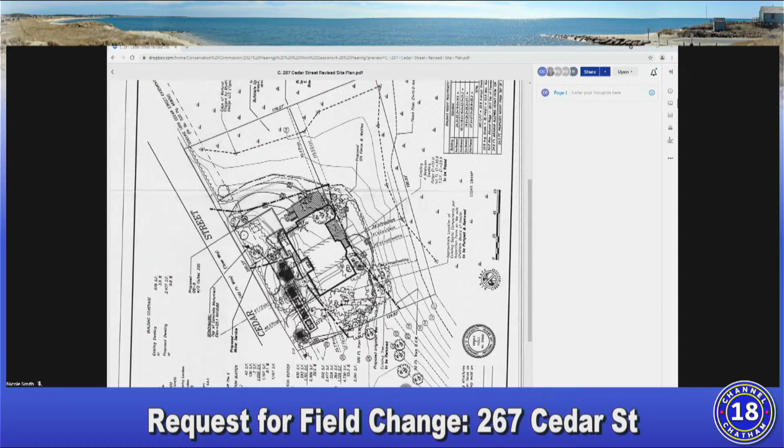Where are you? You're still muted. All right, we just come back to her. Commissioner Sullivan? Yes. Okay. She's not responding. Maybe she had to step away.

So we have one, and I vote aye. 1, 2, 3, 4, 5, 0, and 1 not responding. So it's either way, it's approved. Thank you, okay, all right, thanks very much.

Okay, Nikki, moving on. Sorry, my session got dropped. This is Karen Latin. Gosh, so I'm back on now. For some reason it just suddenly died. It happens, yep, sorry, I always blame Comcast. But I say aye. Aye. Okay, all right, Nicole.

All right, next we have 34 Hallway Street, 34 Chatham Village Trust, map 17C, parcel 16A. Again, this is a request for field change for installation of an irrigation well. For the record, Sean Riley, Coastal Engineering, representing the applicant. The well is to be located between the house and the street. Access is from the street. And again, it's for the significant amount of mitigation plantings that we need to maintain for the first 3 years, so essentially the same request.

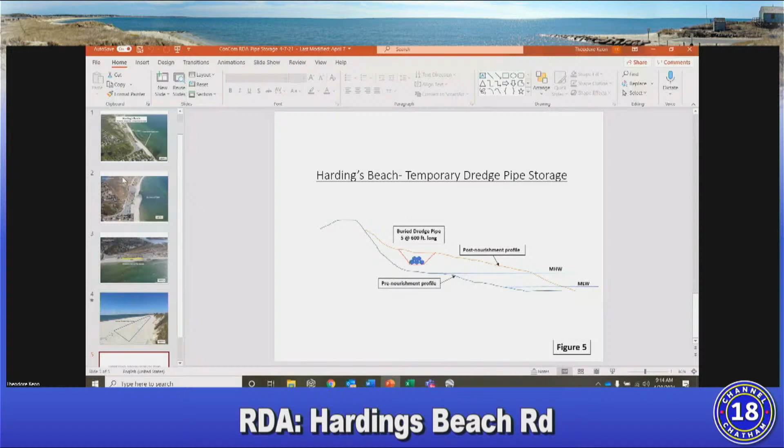Not, well, can you go to the first one? This one? Figure 1, yeah, that's the first. Can you rotate it? Everyone put their laptops on the side. Oh, my laptop, sorry. That's okay, that's okay, we can see. Yep. Ted, right, if you want to share, feel free. I'll exit out. Well, I mean, I think this will work. Oh, well, okay. I can't see what I'm sharing, so it's hard for me to. Understood. Okay, does that work? Yep, okay.

So we did have a site visit last week. I believe 4 commission members were able to attend. So for those that weren't there, I'll just kind of rehash what the discussion was.

A little bit of background. The town has been very active, as I'm sure everyone is aware, with dredging at Stage Harbor, given the very substantial changes that are occurring over there and the infilling of the channel, which has required repeated dredging over the last couple of years, and we fully anticipate into the near future, unfortunately. We dredged last year with a private contractor, and they pumped the material to Hardings Beach, and they focused on both of the parking lot areas where the primary recreational activity occurs. As you see in this picture, there's a very substantial indent, if you will, between the 2 beaches because we just didn't have enough material to progress through that area.

Looking ahead to this current year, the town knew that we were going to be dredging again. The county was able to put us in the schedule; they weren't able to last year. But one of our target sites was the Cockle Cove area, which was very severely depleted in material as well. In order to get the material to Cockle Cove, which is a very long distance, we had to supplement the county's inventory of dredge pipe with an additional 3,000 linear feet, with the full intention that the town would maintain that pipe in the town and provide it to the county for future mobilization as needed and as necessary.

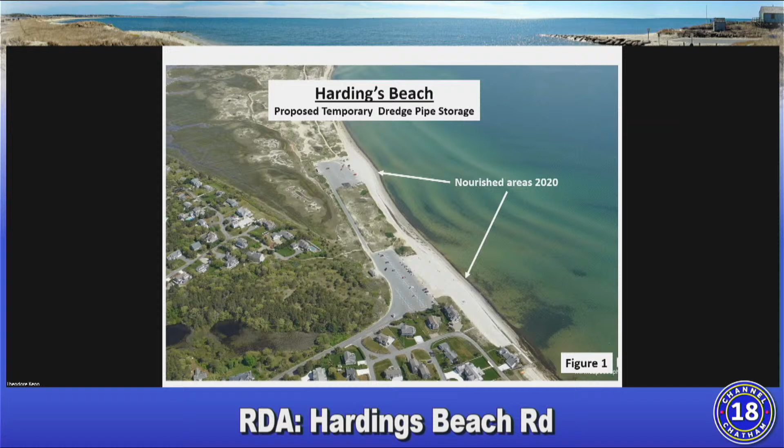So the second picture, we had pretty much gotten much of Cockle Cove filled, but the production was relatively slow because of the very long distance. And we were running out of the window of when we were allowed to do the dredging.

Since Cockle Cove was in pretty good shape, we decided to put the remainder of the material in the area we didn't do last year, between the two parking lots. We placed about 14,000 yards in this area and really improved the midsection, much to the delight of the Park and Rec department, who want to use this area as part of the overall recreational beach area.

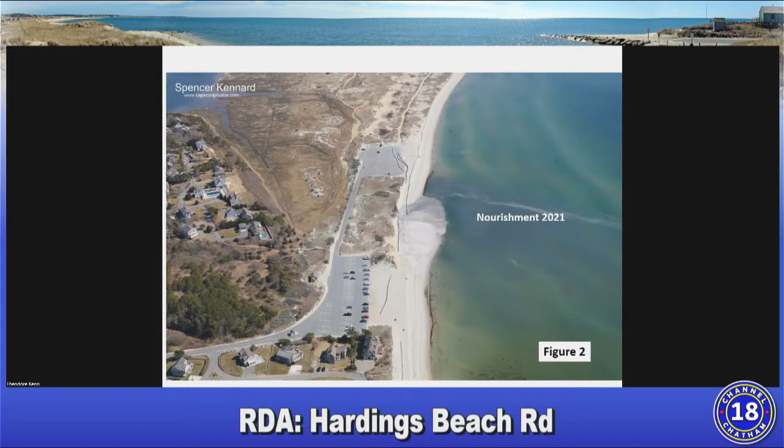So now that we have restored this beach, we have an opportunity to put the pipe under the sand and temporarily store it in a manner that's out of sight, out of mind, and out of resource issues. It doesn't impact the performance of the beach whatsoever. The beach is sufficiently wide now, so the beach functions will be maintained, and there's no vegetation affected.

Based on this picture, there was one initial preferred option at the time before we had done the beach project. We were planning to perhaps put it up in the parking lot in this corner, but that became very problematic to secure the pipe, both for safety reasons, kids climbing on it, and so forth.

The Park and Rec Commission, who had reluctantly agreed to put it there if that was the only option, really wanted it screened with fencing for aesthetics as well as safety reasons. That became another problematic issue.

I had a fencing contractor come look at the site, and he basically didn't want to do the project because he didn't know how he'd secure an appropriate temporary fence, given the wind loads we get here, plus the safety issues.

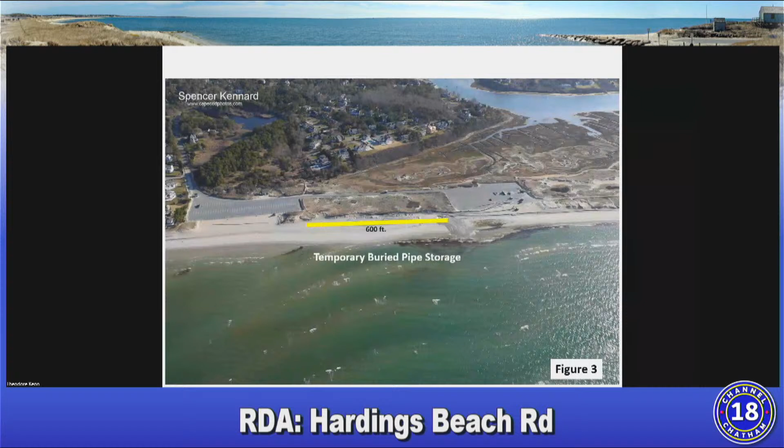Once the beach was completed, it became quite obvious that this would be a very viable place to put the pipe under the sand. Again, it would be well out of the vegetation zone and well up on the beach, so the beach would still function as normal with no impacts whatsoever.

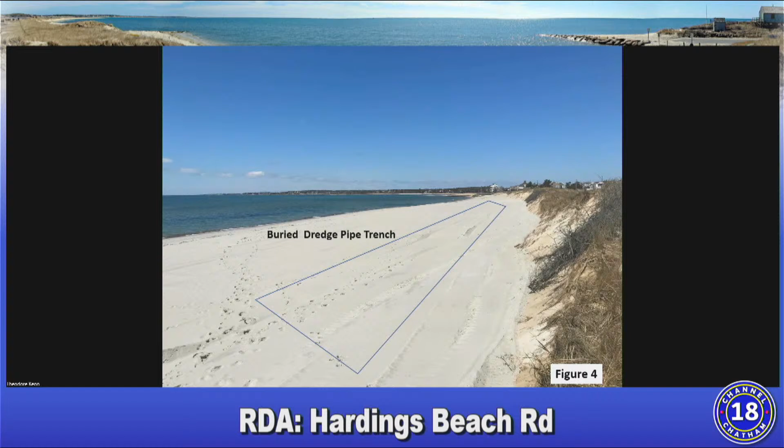As I indicated in the RDA, this has been done for several years in other locations on the Cape. Dennis, for repeated dredging at Sesuit Harbor, does it in this manner, and Pamet has been doing it for many years associated with dredging up there.

This picture gives a representation. The blue line is approximately what the beach looked like prior to the project, and the red line is the beach after nourishment. You can see a very substantial increase on the active portion of the beach, and the displacement seaward of both the high and low water line.

The idea is to have an excavator create a trench along the upper portion — a very straightforward process. We would take the 3,000 feet and lay it in 600-foot sections. The pipes are now fused together in 300-foot lengths, so we have 10 sections, which we turn into 5 sections of 600 feet, since we have plenty of beach length to do it.

So that is the proposal. The entirety of Harding's Beach is under an existing order of conditions to allow nourishment, with activity when these projects are done with equipment on the beach in order to create the beach. But once the project's done and cleaned up, the beach looks like a beach.

So that is our request — if we could place the pump, or pipe as I keep calling it since we pumped it here, into the trench. Right now the pipe is being handled for relocation over to Chatham Harbor. Once that project is completed, our section will come back and be available for storage, hopefully in the mid or latter part of May. Given the time of season, the recreational concerns are legitimate, and we really want to get rid of the pipe as soon as possible.

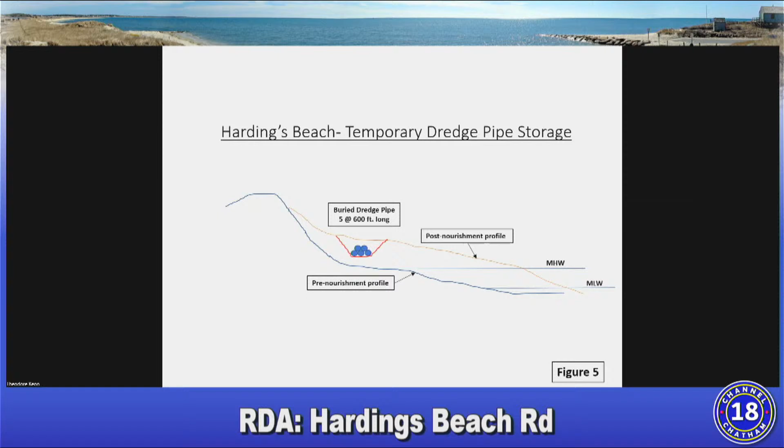The only other really viable option we would have is to cut the pipe back up into its initial 50-foot sections, which is how it's delivered to the site, load it up on trucks, take it to the water treatment plant, store it, and then next year, when we'd be doing another project of this nature, put it all back together. That's not an easy or inexpensive operation. We're estimating that would annually add approximately $20,000 to $25,000 per episode to get the equipment, expertise, fusion machines, and trucking back and forth. So if we can avoid that, that would obviously be our preference.

And with that, I'm back. Okay, happy to answer questions. Thank you. Oh, feedback.

I just have a quick question about the dimensions. The trench is 600 feet long. What is the bottom depth? How far down do you dig? And how far above the placement of the top of the pipes would the surface be? That's going to be somewhat of a field call. The diagram I showed had the pipes, 3 on the bottom, 2 on top. It may ultimately be preferred to just lay them 5 side by side. We've still got plenty of room. I'd be working with the excavator operator as well as our dredge supervisor from the county, who has done this, and kind of play it by ear on what we feel is the best method to get it in there. At a minimum, we'd have at least probably 3 feet of cover over the pipe.

3 feet. And how far seaward from the bottom of the vegetated dune would the trench be located? Probably about 10 feet or so. Well, again, well beyond the toe. Okay, a minimum of 10 feet. You've got to figure out, yeah, you've got some, okay.

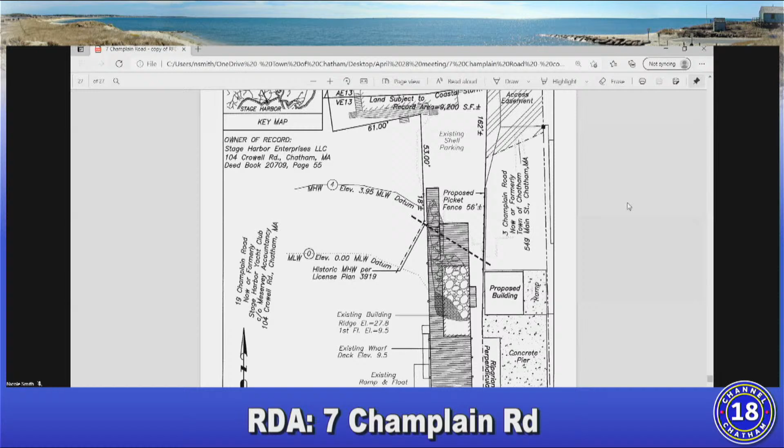Good morning, David Clark here on behalf of Stage Harbor Enterprises. I would think this is a very straightforward project. In the narrative, I did outline the need for this fence. Being a sailing school with dozens of kids there during the summer months, the club wants to have a barrier to keep the two uses separate. We have an industrial use next door and an educational use on our side.

The fence would go in sometime during June in the spring, and classes usually end the end of August, so the fence would come out after August. And being removable, if there was a coastal storm in the forecast, the fence could easily be removed, as well as all the other sailing items that would be on the beach. So there would be mobilization in the event of a storm to remove other stuff, and the fence is something easily removable.

No further alteration of the resource area is proposed, so we feel that this is approvable under an RDA.

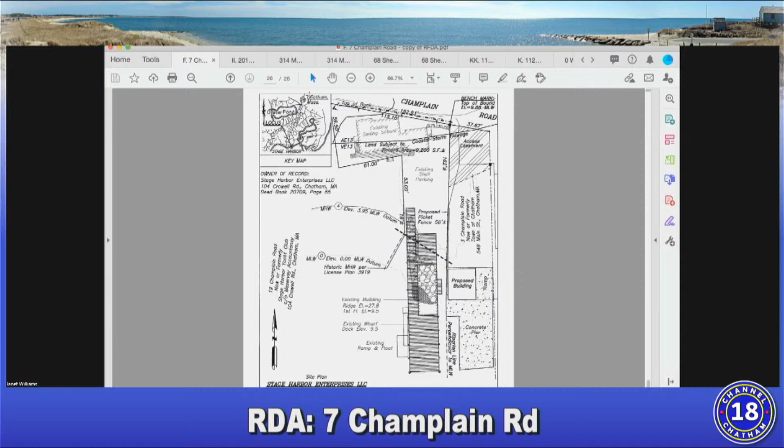All right, thank you. So David, as I read the photograph that is submitted, are these representative of the permanent supports that are proposed, or just the location of the fence? The location of the fence. So it's basically along the town's retaining wall. Okay, so it's going to go right up against that wall. Yes.

What will it be sitting on - some sort of support, or dug into the ground? I anticipate that it will be some type of galvanized pipe installed right adjacent to the wall that would be somewhat flush to grade, certainly not higher than the wall, and the fence post could either slide into it or over it, one of the two. Okay, that makes sense. So nothing - I was looking at this going, are they going to be sticking up like that?

Okay. And the fence, is it plastic material? I believe so, plastic, okay, so a white plastic picket fence. Gotcha. Okay, questions?

Rawls, I was wondering how tall the fence is. I believe it's 4 feet. And the slats, is there a distance between them? Yeah, probably a couple of 3 inches or something like that. There's a vertical barrier now for wildlife because of the retaining wall, and it's not really habitat for large wildlife anyway because of the commercial use next door.

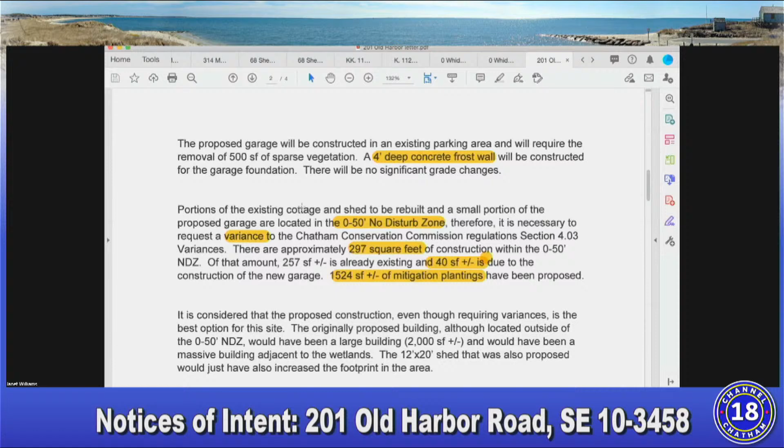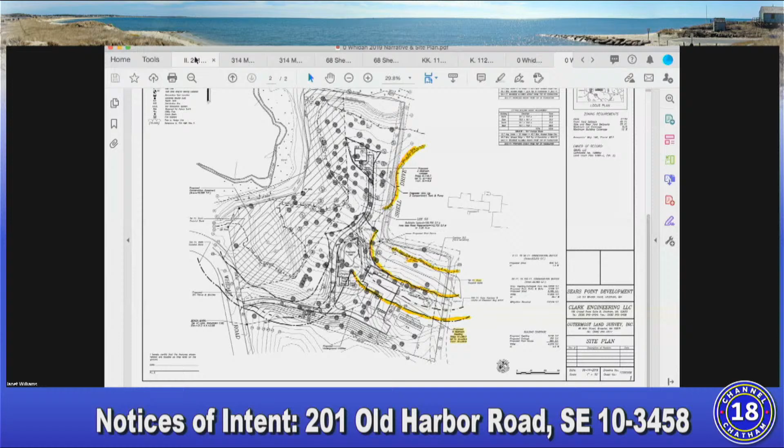It should be added to your narrative. Okay, I will ask our surveyor to look into that. Yeah, it's pretty clearly spelled out. Is that on the town website? If I may note, look at sub 2 and sub 3 of that section.

Oh, you know what, that's the one that's missing from the website, Janet. That's why we missed it. I just opened up my packet and took a look, and that's the page that is missing. So we need to get you a copy of the provision. Yeah, they still haven't corrected it. Maybe we ought to ask the town to add that. Again, we've asked, we'll ask again.

In the meantime, we will get you a copy of that. Make sure you have it to give to your surveyor so they can match the requirements. Excellent, thank you. Okay, so with all of that, the next hearing date is May the 12th, which would mean you would need to get us everything we just talked about by May the 7th at the latest. Is that doable? Let me look at the calendar.

It's 10 days from now, essentially. We need to get you more information 10 days from now. Or we could push it out to May 26th and give you 2.5 weeks to do it. No, I don't want to push it out anymore. We started this in August of last year, so it's a long process, but we're getting there.

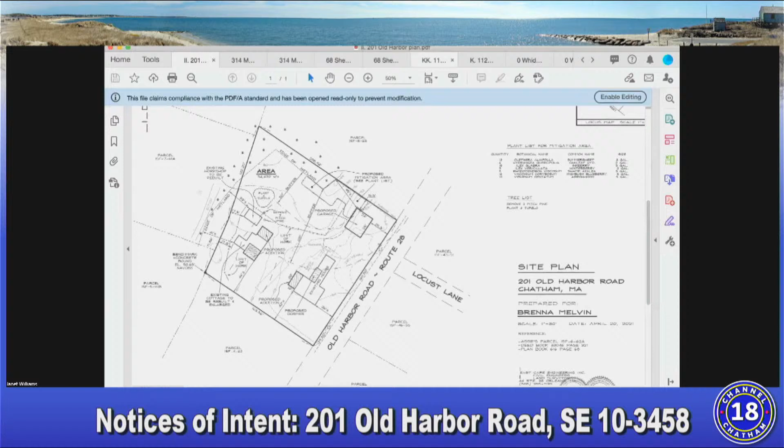That's continued to May 12th. We'll see you back here then, Mr. and Mrs. Melvin, thank you for coming. Hopefully we'll wrap it up at that point and you can get going with your project. Thank you for your time. Thank you very much.

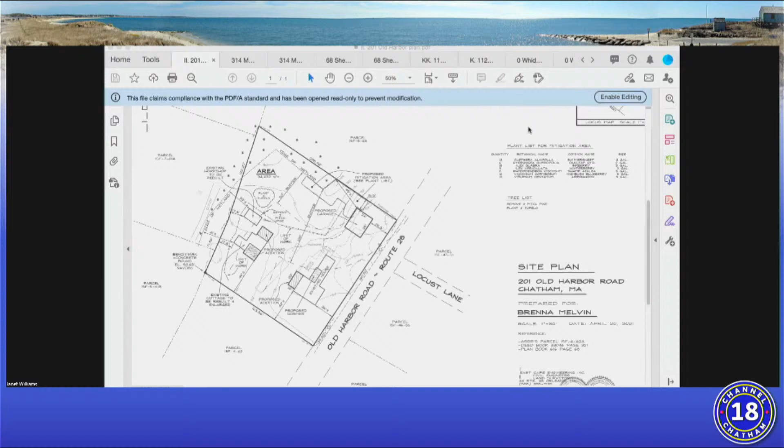All right, Nicole, next one. 314 Morris Island Road, Timothy Sheehan, trustee, 692 Tremont, Unit 4 Realty Trust, map 15A, parcel H87, SE 10-3468. Continuance of an after-the-fact notice of intent for the proposed installation of a garden shed and garden.

I did receive in my email a request to withdraw this morning, which I was expecting at least. So I don't know if Thad wants to speak. I would encourage him to, because I think some of us have something to say about this. Sure, Thad Eldridge here, East Southeast. We have submitted the request to withdraw this application. I've reviewed a timeline with the agent to get a new permit in place for the remediation of the area, and we'll happily take your comments.

Wait a minute, when you say a new permit in place, is there going to be another NOI filing for the restoration? We have to do something, the old permit is now expired. Right, and if he's going to go in there and restore the garden into what it was originally permitted to be, which was native landscaping, he's going to need some mechanism, some permit in place for that.

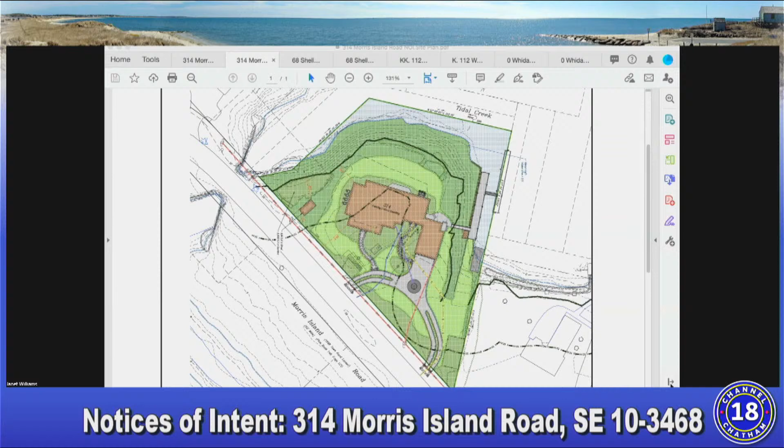Okay, then is there a motion to approve the withdrawal of the NOI for 314 Morris Island Road? Rawls move to approve the requested withdrawal. Is there a second? No,

Let's be a little bit more specific on the motion. I mean, we can approve the withdrawal, but we also need to approve the agent sending out a letter setting appropriate deadlines for new filing. Okay, do you want to phrase that as a motion? That would be good.

Okay, let's see. The motion is that the commission would approve the withdrawal contingent on the agent sending a letter to the homeowner noting that they are still under a violation notice and need to file a new notice of intent in order to correct things by, let's see, what date, did August 10th, right? Mm-hmm, yes. Yeah, that the letter would note that August 10th is the new date for the submittal of an NOI to correct the violations that have existed on the property for some time.

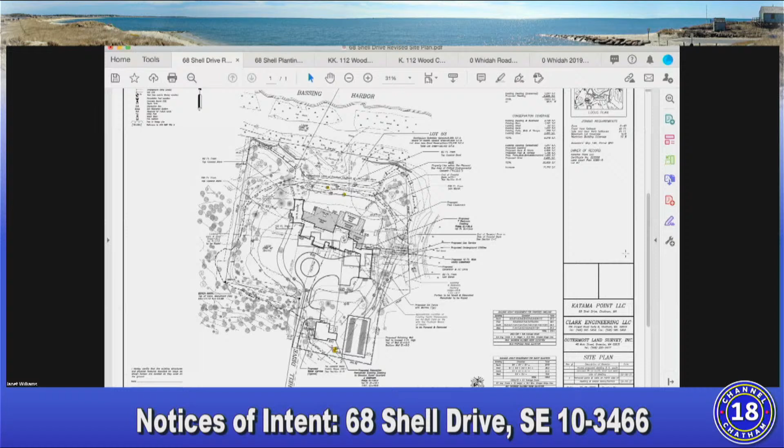So basically what we've done is we've left the driveway so that it is at the floodplain or a little above it, and that's so we have fill between the driveway and the house. I was talking with Jay Briggs, and he said, 'Do you need all that fill?' I said, 'Well, no, we could always put a retaining wall there, and then somebody could fall off and hurt themselves.' But, so we've even removed fill, or proposed to remove some of the proposed fill,

in greater amounts than is shown on the plan you have. Basically, the fill we want to bring in is for the driveway, so that emergency vehicles can have access. There are other homes on Shell Drive, but no place to turn around, so this would give emergency vehicles a place to turn around. It would also provide access to the property, even in flood events, which we hope don't happen.

And we're proposing to extend the berm on the Bassing Harbor, the water side of the property. The berm was built there back in the 90s. And as you might recall from the Woods Hole presentation, one area where flood waters can enter the property is at the western end of that berm. So what we'd like to do is finish that berm and merge it into the higher ground there on the west side.

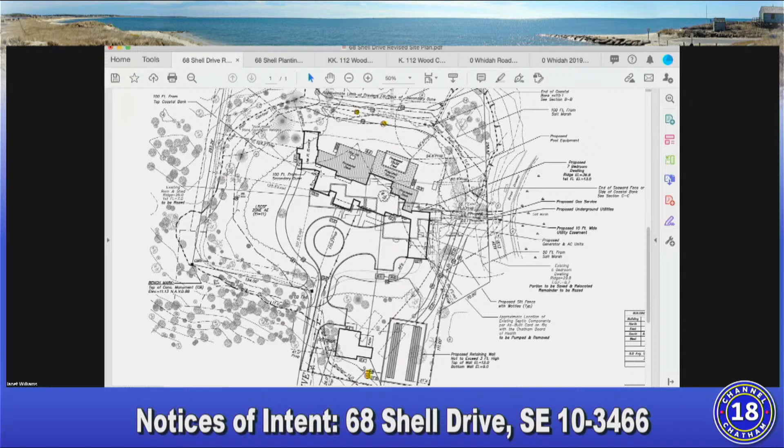Okay. I'll check with Sarah Clark and send you an email, but there's certainly time for a couple of meetings with the commission before our zoning day. Okay.

Okay, with all of that, are there questions? We have lots of questions, but I think most of them will get resolved once we have a revised plan, a narrative, and conduct an on-site visit and understand exactly what the proposal is at this point. Let me just ask if there's anything anybody else is asking for.

Bob Rawls: We're still bringing fill into the project, and whenever we're looking at a site map that shows contour lines, it doesn't tell me in a very clear way how much fill is being brought in relative to what's there now. So I was wondering whether you could, in a graphic way, indicate with hatch marks or color where areas of fill are going to be, and an indication of how much fill.

That way we could actually see it. I think the clearest way to do that is probably to do some section lines through the building, maybe 2 through the driveway and 1 on the north side. Right, something like that. Yeah, that would be great.

So you mentioned that there's a couple thousand square feet of additional coverage, the proposed deck on the north side. So is the mitigation plan changing? It will be, yes, but we don't have that yet.

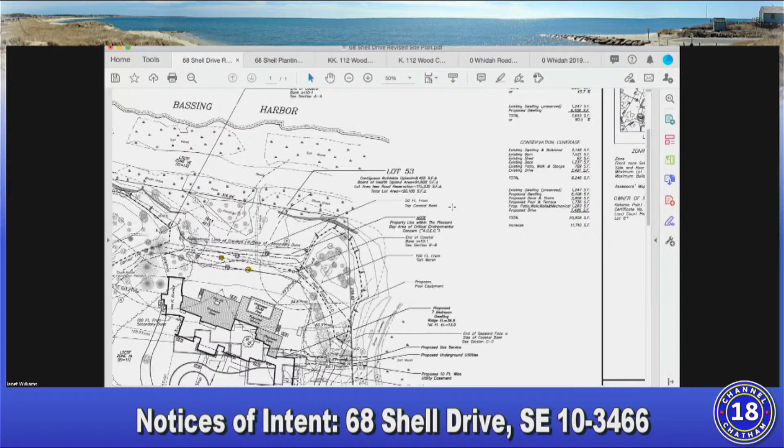Good morning, everyone. Teresa Sprague with Blue Flax Design. I'm just going to give you a quick overview and walk you through the land management plan that we've submitted, but having the site plan up while I'm doing this, I think will be helpful.

First of all, just a discussion of existing conditions. Much of the property is wooded, greater than an acre with existing mature canopy: oak, pitch pine, spruce, eastern red cedar, etc. We have a lot of existing naturalized vegetation, although the site does contain a significant amount of invasive vegetation, along with areas of undisturbed habitat mainly on the western portion of the property. The invasive vegetation includes bittersweet, border privet, shrub honeysuckle, autumn olive, porcelainberry, Japanese knotweed, barberry, multiflora rose, English ivy, vine honeysuckle, and burning bush, as well as a significant amount of native but aggressive greenbrier.

As noted, there's an easement wrapping around the south and west sides of the property that allows neighbors beach access, and the path within the easement begins on the west side of the shell driveway at the entrance to the property, and winds through the wooded area on the western side to allow access to the beach. So our proposal is to manage invasive vegetation throughout.

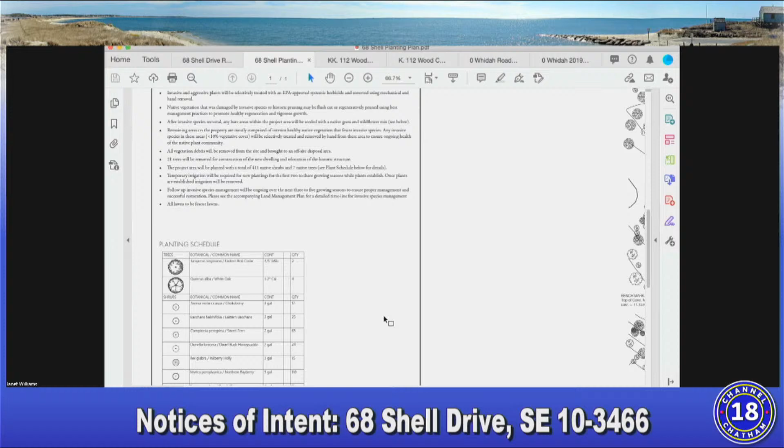So I guess in answer to Bob's question about whether we're increasing, I think if we're at 34,000 square feet of mitigation and restoration planting, I think we're pretty good in terms of area per coverage area. So I don't know that we have to increase it.

Well, Bob Rawls, I actually wasn't suggesting that it needed to be increased. I was just a little confused because the number of trees coming out, and the number of trees going in, and the number of shrubs going in are the same as from the last presentation. So I was wanting to make sure, but it does seem unchanged.

Right, and I remember at the last time we talked about it, we asked whether or not more trees could be put in to replace the 21 trees coming out. So I expected in this revision to see some discussion of that, but I didn't see it. Okay, I can discuss that with the applicant too.

Okay. Bob, anything else for now? I think for now we're fine. Okay, Bob Delvecchio? I had a question about

the planting of anything underneath the decks, the raised decks. Is it possible to plant any vegetation, shade-resistant plants underneath the decks at all? Well, the decks are located on the north side of the house, and I think it will be difficult to get any significant vegetation underneath the decks. To be very honest, I would imagine that underneath the decks would probably be gravel or pea stone to allow for infiltration of water coming through the decks. But I think the decks are going to be quite shaded on the north side of the house as is, so it would be really challenging to get significant vegetation planted underneath the decks.

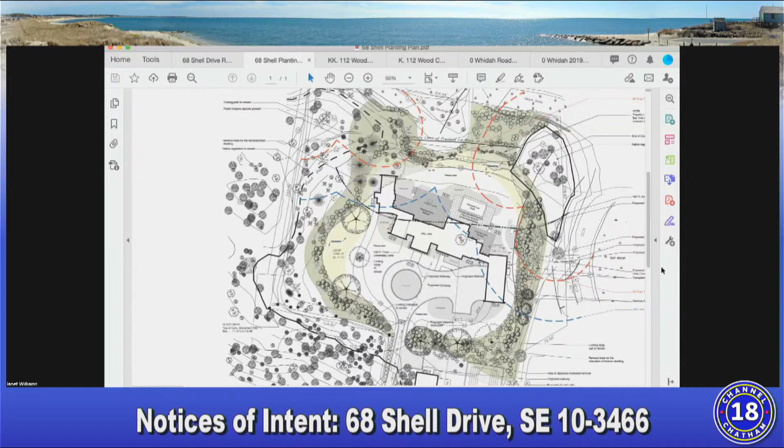Okay, I would say May 26th would be the first feasible date, given that we have to organize an on-site. All right, then I will try and set something up the week of the 17th for a site visit. Or earlier, depending on whatever everybody's schedule is, we should structure the poll to start as early as possible and see how we can get it in, even starting late next week.

Madam Chair. Yes. Is it possible we can continue it to the 12th in the event that we're able to get the meeting scheduled? The project's been hanging fire for a long, long time, and the applicant, understandably, is getting a little anxious for learning how we're going to be able to proceed. So I understand if...

If the site visit doesn't take place before the 12th, all we would do is send a letter in requesting a further continuance. Okay, but given the list of things that need to be developed and submitted before the next hearing, let me just run through my list, and Nicole, you can double check it and see if I've got everything.

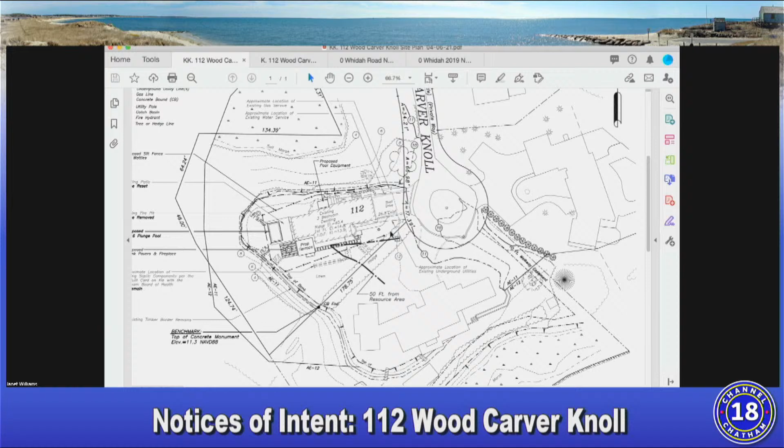The bank is well defined. It's relatively steep, but between the bank and the river are significant salt marshes to the west of this. We show a limit of work fairly close to the activity to minimize any transgressions. The total square footage of increase within the no-disturb zone is just under 550 square feet, and again, that's all within lawn area. This property was developed, I think, back in the 70s or early 80s, so there's been a maintained lawn around this house since it was built. And really, there's no loss of native wildlife habitat, just lawn, and mitigation is proposed for these increases.

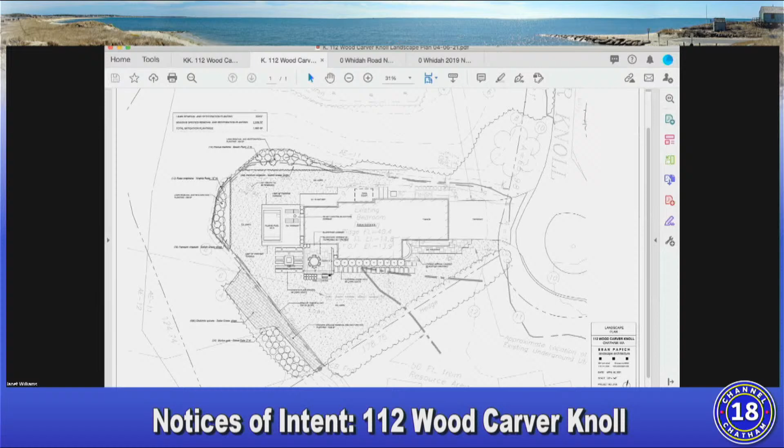And that would be my presentation. Okay, thank you. Is there also a landscape plan? Yes, I'm sorry, I think Sean Papich is also on the line to answer questions on the landscape. Are you all seeing the landscape plan, or is that showing up? Are you still looking at the site plan? I can't quite tell, I think we're seeing the landscape plan right now. Okay, thank you. Yes, okay.

Sean, are you there? I am here. Okay, do you want to walk us through the landscape proposal? Absolutely. So one of the things I wanted to mention - when David was speaking about the plunge pool, it's really more of a large spa. They come precast, it would be set at grade and proposed to be on the footprint of the existing stone terrace. There's already an existing terrace there, so our intention was to place the plunge pool within the surround of the existing terrace, just to make sure you're clear on that.

The other elements you can see are the terrace, which we also typically build as a permeable base. So we'd propose to do that in this case. Then the stepping stones heading toward the fire pit area between the two terraces will also be spaced with lawn joints, typically about 6 to 8 inches, giving a substantial amount of space for permeability.

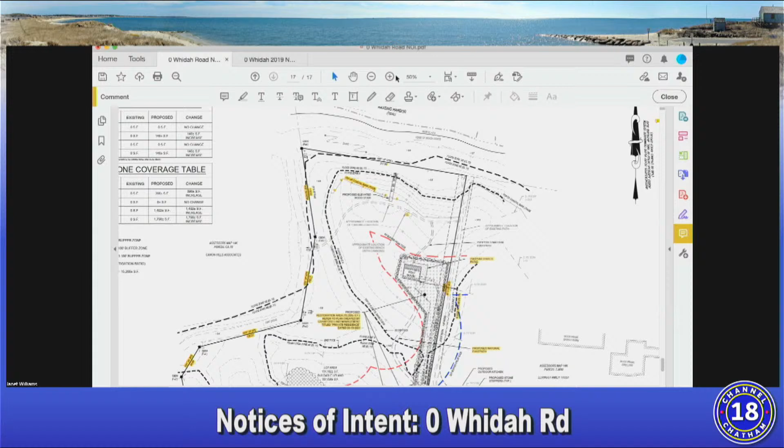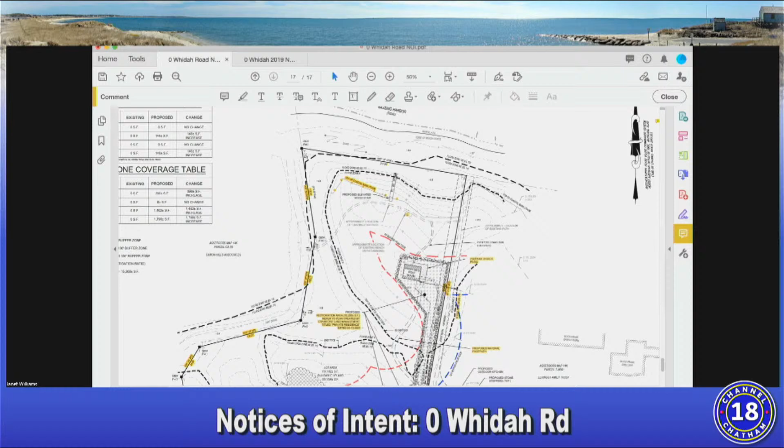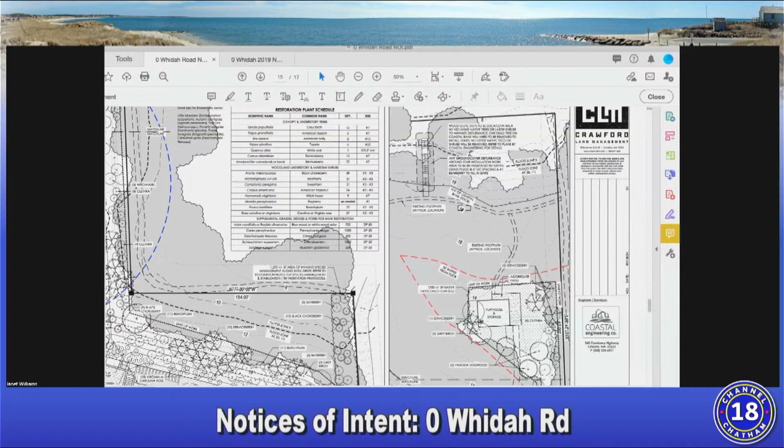I had a question about the staircase. The property is in the Pleasant Bay ACEC, and local jurisdictions in Pleasant Bay are required by state law to have standards stricter than what we'd otherwise apply. I noticed on the staircase design there was reference to a FEMA guidance document, and I thought, since this is in an ACEC, the more appropriate guidance might be the Pleasant Bay Resource Management Alliance guidelines for private walkways and stairs, particularly page 6, paragraph 6A1. It may not make a difference—I rely on our experts for that—but it strikes me that would be more appropriate guidance for the stair walkway than the FEMA document.

One thing I can tell you about the location is, if we walk down onto the existing footpath on the site, you'll see for yourself. We located the stair access in an area that won't really disturb any existing vegetation—there will be no tree removal needed. The vegetation at the bottom of the bank is sparsest there, so we tried hard to choose a location that would actually result in more vegetation after the staircase goes in than what's there now. You'll be able to see that on site. It doesn't exactly address your point, but I wanted to mention we looked at that area carefully and tried to locate it as sensitively as possible.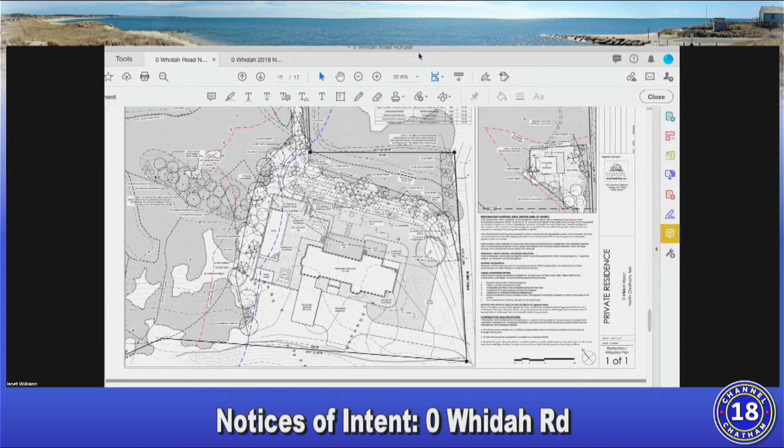Also, I was concerned when I was looking, and maybe it'll become more evident if we do a site visit, but around where the pool is, it seemed like there were an awful lot of trees being removed. I know you talked about the longevity of some of these trees and that they're nearing the end of their time, I guess, but I was concerned over the number of trees being removed beyond the pool that don't seem necessary to remove.

I think it would be better to address that piece from the construction standpoint, with the work that needs to be done. What we're trying to do is be realistic about the amount of space needed to construct that pool area, and some of the grading that's required just to the left-hand side of the pool. So what we've done is tried to site the limit of work as close to the pool area as we felt was reasonable with the work that's proposed.

It's certainly something that when we're on site, we can take a look again and see if it's possible to think about construction methods to pull that limit of work in maybe another 5 feet or so, to see if there are some trees we can save. Also, during construction, we can stake out that limit of work and see if it can be adjusted to save any trees within 5 or 10 feet of that line. I think anything that can save some trees is preferable. Thank you, that's all I have.

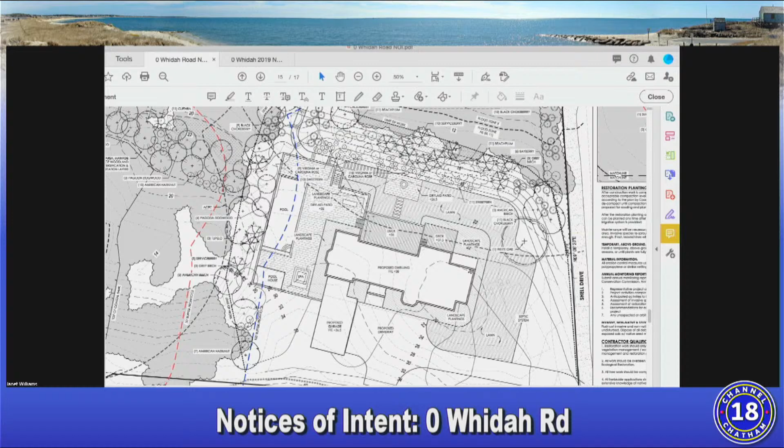Okay, thank you. Terry, any questions or comments from you? Let me just make sure, can you hear me? Yep. Okay, no, not right now. I'll probably have something on the site visit. Thank you. Okay, thank you.

Trina, anything? No, nothing additional from me, definitely looking forward to the site visit as well. Okay, I think all of mine have been hit as well. Nicole? Same, I think everything that I've thought of has been addressed.

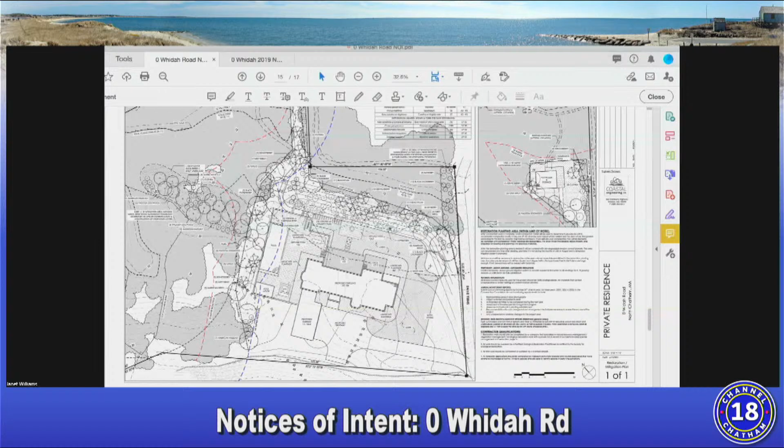Do you need to go to zoning for this? At some point, I think as with the previous submission a few years ago—go ahead, Bob, sorry, I started with Tom by mistake.

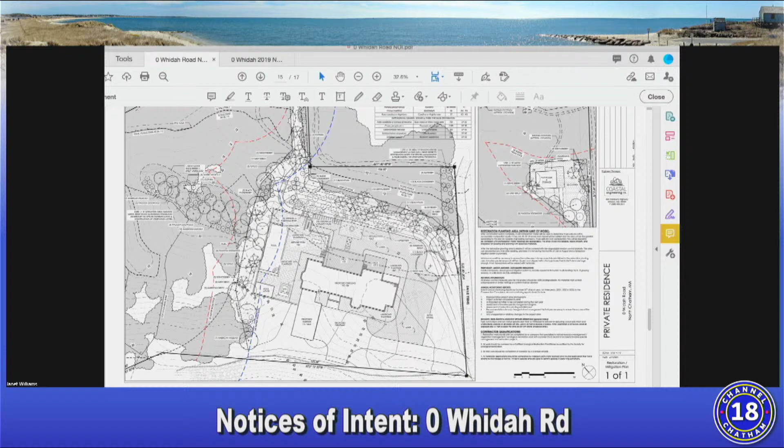Maybe unless I missed it, I don't see an inventory of any kind indicating the trees coming out within the resource area—size and species, for example—it just gives us a better idea, and ideally why they're coming out. In other words, whether they're within the limit of work, diseased, or whatever. We just need to have a very good handle on which trees are coming out in our jurisdiction and why.

Actually, locating them on the plan can answer a lot of those questions because we can see right away. I think the easiest thing for us to do, since the limit of work is staked in the field, and the 100-foot buffer from the coastal bank is staked in the field, would be for me to tie flags around them so you can easily identify them when they're there.

No offense, but it seems to be a waste of time to survey trees that may ultimately be removed. Yep, because they're within a limit of work, but I'm more than happy to do an inventory of those and provide you with a list of species and sizes that would correspond with what's flagged in the field, if that would be most helpful to you.

An inventory would certainly help. There are right now blue ribbons, blue flags on. Those are old and they are not accurate. So I will make sure that those are all updated before.

I think one of the big differences is with the previous filing. I think one thing that they were trying to do was to remove tree removals all the way down to the property line to try to gain views. We have not taken that same approach to this project. So the flagging that is out there, like I said, is old and inaccurate. I'll make sure that it gets updated before the site visit so that what you see is an accurate representation for what would be within the 100-foot buffer zone to the coastal bank.

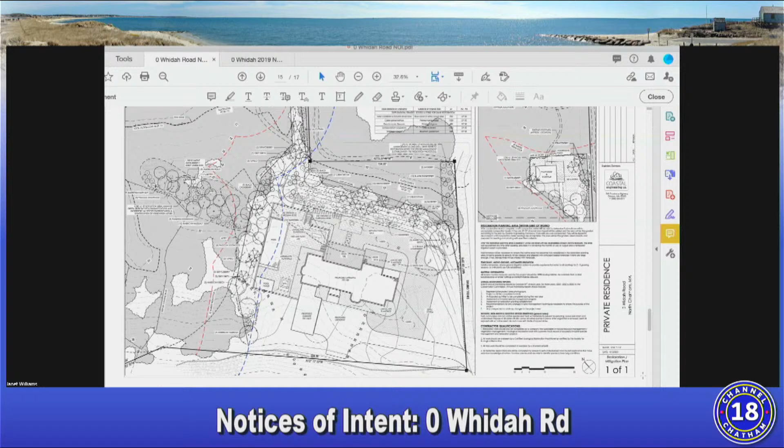All right, well, you heard the drill before. We'll get this arranged. Do you want to go with May 26th, or is there a reason you want to try to get it done sooner? Well, we're going to have to do the on-site in the next 4 or 5 days. So are you able to do the revisions we've talked about by next Wednesday to hit the 12th?

It sounds like what you're looking for from me is more about the tree inventory, and then to have those corresponding trees within that 100-foot buffer zone flagged on site for review when we go out there. That work I can have done relatively quickly. If there's anything else you need from me, please tell me, and I'm sure I can accommodate.

Doesn't seem like it's much at this point. It's just the updated plan schedule, the inventory of removal trees, and the correct flagging. Nicole, is there anything else that I'm missing there? Nope, that's all I had.

How about our schedule? Do we know anything about what we've got on tap for the 12th? Am I overloading things by moving them to that date? 68 Shell, Wood Carver, 201 Old Harbor. Oh, it's going to be like today all over again, Groundhog Day.

80 Ridgevale, the 2 Woodland Ways — which, while I'm thinking about it, we have 263 Woodland Way at 10 a.m. tomorrow. And 83 Seagull and all those other properties was slated to be on, but I'll talk about that at the work session. And then it looks like 1711 Queen Anne.